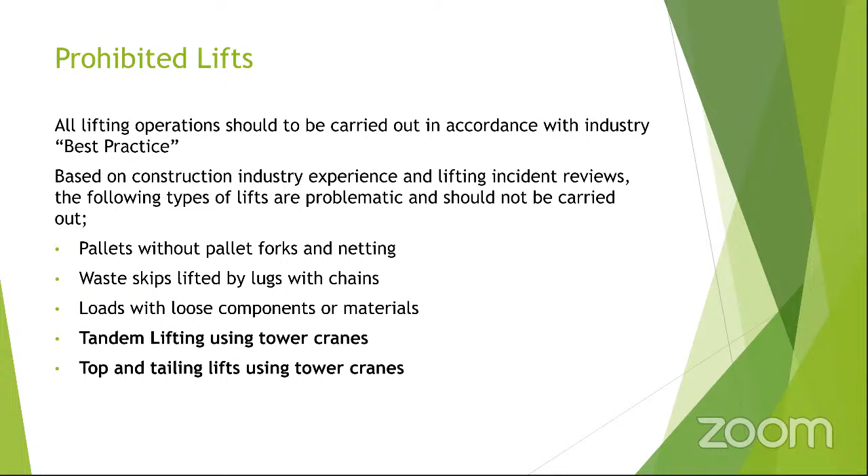Agreed. Anybody else? Okay. Now we're gonna touch on these topics.

The first one's gonna be what you're all interested in, probably: multiple crane and tandem lifting. Now, these should only be carried out when it's not possible for the load to be lifted by a single crane. If you can't, the best thing to do in any case is just to keep going up on the capacity and try using it with a single crane.

But if the load weight's above the chart capacity, physical dimensions are too large, or the characteristics of the load, maybe it's got lifting points at either end and it's a bit fragile in the middle or not very flexible, needs a lifting beam, and the lifting beam might actually take you over capacity for rigidity, and the center of gravity might be at one end or eccentric.

For mobile crane tandem lift, sometimes you may have difficult movements. You may have to move the load a fair distance, or you've got access restrictions. So all these are probably setting you up to do a multiple crane or a tandem lift. But if you can at any point, always look at using a single crane. It's far safer.

Okay, now there's a lot here on the planning, but the main thing to take away from here is you need to do a site visit. You need to go out and establish where the services are, ground conditions, access and site restrictions. Can anybody tell me why you would carry out underground conditions?

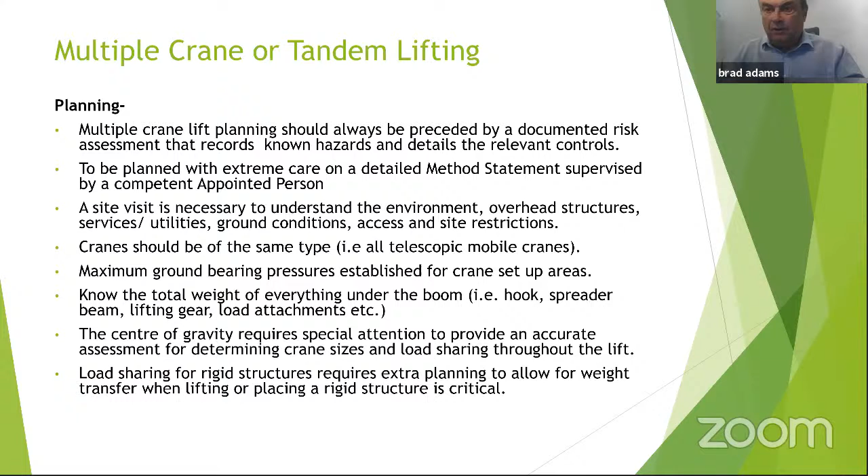When I worked at the airport, I was doing gantries, tandem lifting every day for like 10 months. And I could phone up the people in France and they would tell me exactly how much this 30-ton gantry weighed within a couple of 100 kilos and exactly what the center of gravity was. So it was so easy to work out my load share.

Okay, so where are we now?

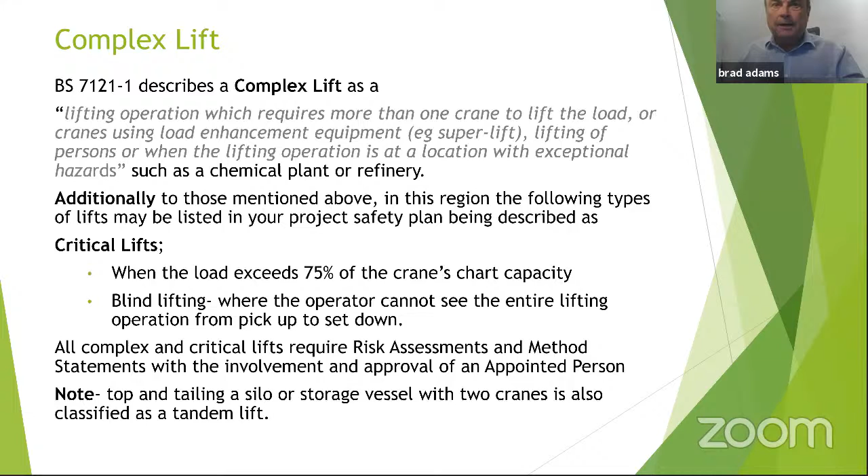Next one. Now, when you've worked out how many cranes you may need, 2, 3, or 4, and you've worked out the load share, it's best to add on. Here's an industry practice: 2 cranes, add 20% on from your load share. 3 cranes, 33%. 4 cranes or more, add 50%. You have a bigger degree of things going wrong with 4 cranes, so you need to be able to take almost half the load again.

Now you've also got to make sure the cranes are positioned to ensure that the hoist ropes remain vertical at all times. Can anybody tell me why you need to make sure the hoist ropes stay vertical on mobile cranes?

Brad, I think we have some appointed persons with us. Let's put the question to the audience. Guys, feel free to unmute your mic. It doesn't matter whether you're right or wrong. Let us share the thoughts so Brad can help you. Thank you. Hi, Brad. Good evening.

So we have to ensure the load lines or hoist lines are plumbed, mainly to ensure that side loading is not happening on the superstructure of the crane and the boom, which is only designed to take the vertical loads. Correct. Now, this is a big problem. If your hoist ropes are out and you're putting side loading on a crane, you can fold up a boom quite easily.

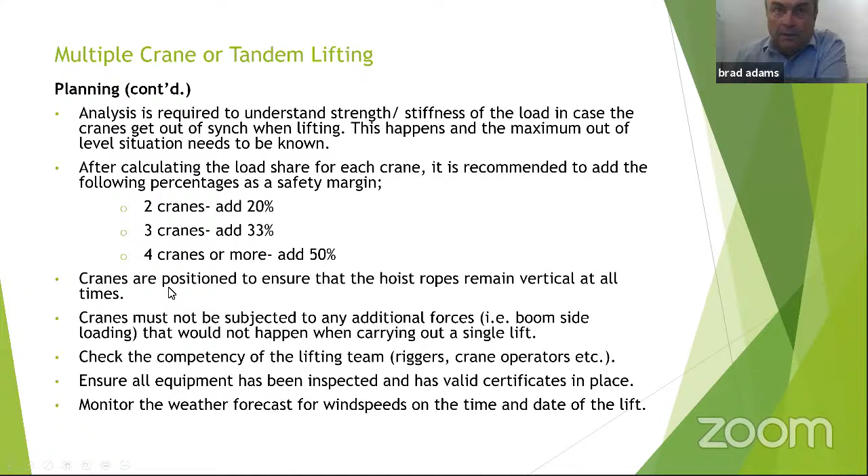During operation, you need to specify one competent person in charge. There's a tendency when everybody has big cranes and everything's going on, lots of people come out and confuse the operators, and somebody thinks they know better. You just got to stop it. You've got to put a total exclusion zone around. You'll have the client down there, all the engineering supervisors, probably the project manager, an audience, and everybody wants to jump in when something goes wrong. You've got to appoint one guy to monitor that exclusion zone, one guy, normally an experienced crane supervisor. If no one else, the appointed person takes over because it's his responsibility.

This is the only person to direct the crane operators with instructions. The communication method between the crane supervisor and each of the crane operators is critical, to enable unison in movement and ensure safe lifting. If it's possible, and you can see the operator, the load, and all the operators, hand signals may be used. But whatever you decide on, stay committed to the communication plan. Don't start changing it halfway through. Whatever you've written down in the communication plan, follow it through.

Now, the cranes are big, they move slow. The bigger the crane, the slower it moves. So ensure there's only one motion at a time, in the same direction, at low speeds. If you pick the load up, pick the load up. If you want to then slew right, do that. Don't try and go diagonally up and over at the same time—it'll just cause you problems and put side loading on the crane. Just break it down into steps: I want to take it up, okay I want to move it right, okay and I want to boom out. That's very simple.

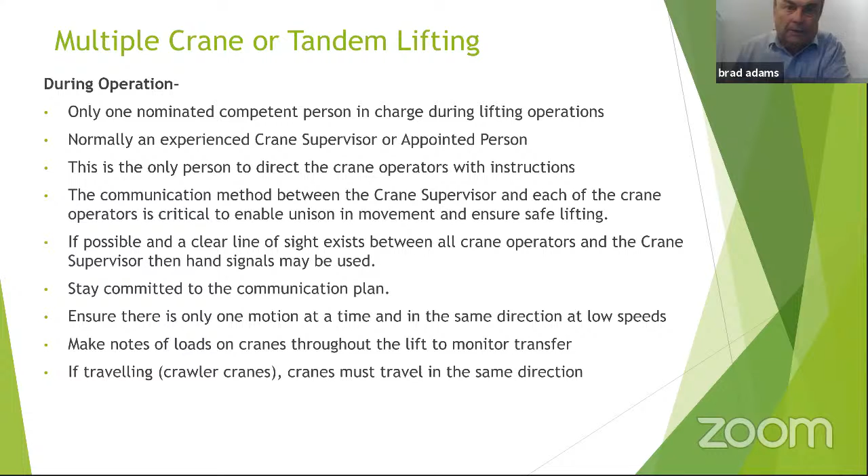And if you're traveling crawler cranes, make sure they travel in the same direction. They're both going forward, not opposing each other and twisting. Any questions on that? We're going to go to the next operation.

Tips. Some of you might have heard about shock loading. It used to be very common years ago, before they had really accurate RCIs. You use the RCI almost like bathroom scales. Say you've got 15 ton on either crane, and that's your load share, worked out with a hook block and everything—just for sake, it's 15 ton. So you would take your crane up in equal increments: go to 5 ton, 10 ton, 11, 12, 13. Then when you get about a ton below your calculated load, start going up in 0.1 of a ton increments: 14.1, 14.1, 14.2, 14.3. When you get to the calculated load, hold and check.

Very rarely will you get it exactly right. One crane might be off the ground by an inch, the other crane might still be sitting on the ground, but the loads are close. So if the crane's off the ground at 15.1, you hold him there because he's off the ground. You take the other crane out—15.1, 15.2, you may find you have to go to 15.3. Then the crane will equalize out at 15.1, 15.3, and that's your new load, okay? And then up you go.

Once the load's on, unless you start moving it around the center of gravity, the load should stay fairly constant, unless it's a top and tail. Now check these load values against the calculated figures on the plan. Once it's off the ground, check, because you may find somebody's added some stuff on there, putting you 2 tons over on each crane, and you're now into your safe margins. At this point, if it's over by a big margin and out of your safety margin—only you will know what you're comfortable with, like 5% over, 3% over, within your margin of error.

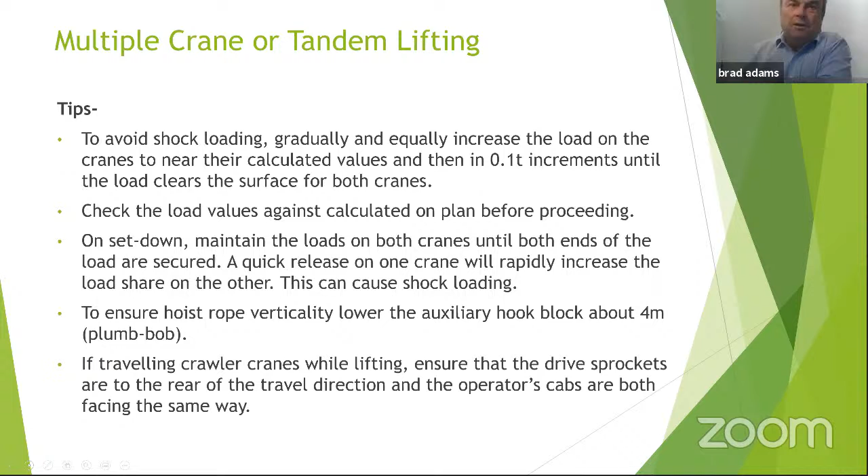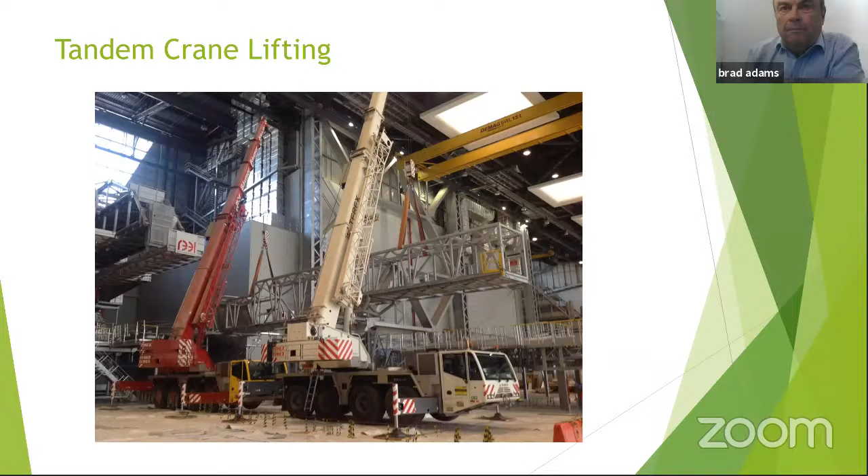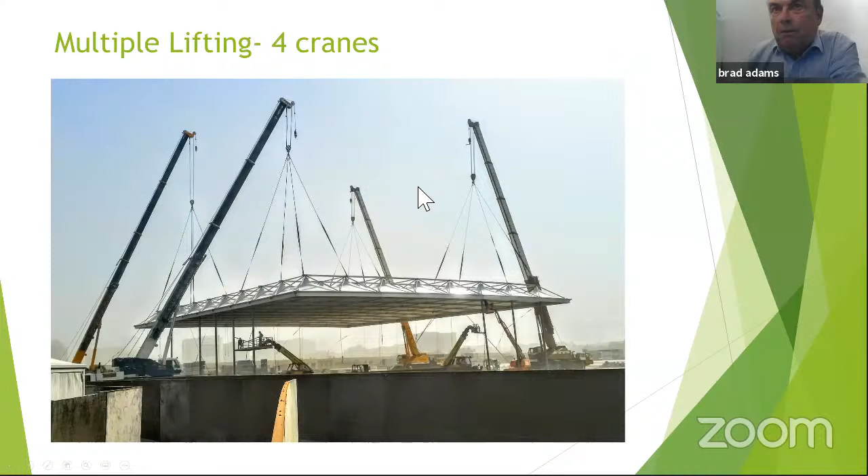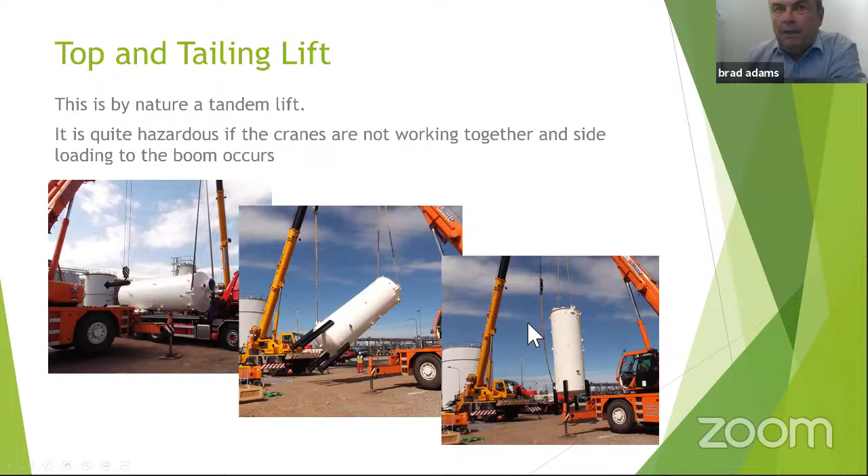Now I'm going to show you a chart which is quite easily available on the internet, but it gives you the total load share. When you're moving the center of gravity and it gets underneath the other crane, it will rapidly go from 50-50 or less to completely on one crane. So the top crane starts at 440,000 pounds at 0 degrees, and finishes at 670. The same on the tailing crane - he's starting at 230,000 and finishing at 0. Notice it's quite gradual, slowly, up to about 65 degrees, and then you start hitting about 75, 80, 85, it just rapidly decreases. So this is where things can go wrong and the pressures can change quite rapidly. It starts at the full weight and the other crane starts at 0, but in between, this is the gray area.

Now, if you're really clever and you do one of these lifts, you can get the operator to magically hold it at 45 degrees and go out and start mapping this out - you'll know for yourself.

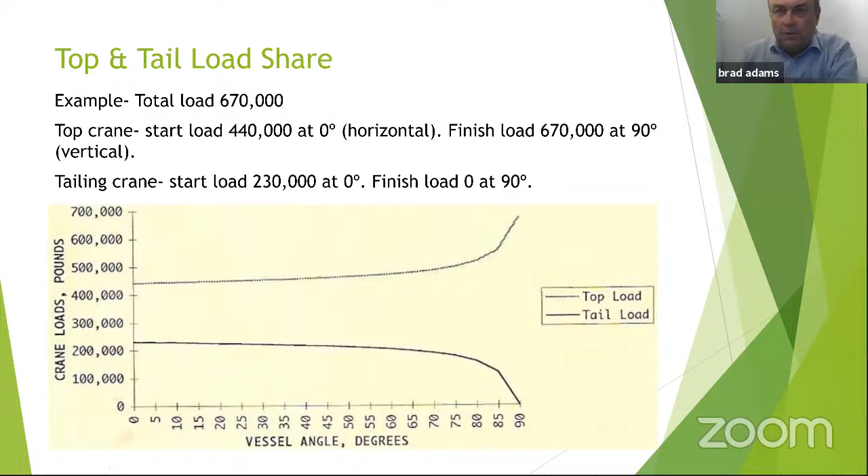It's nice to have this for future reference, because you'll see the same scenario come up in your career more than once. Now, what I'm going to show you happened 4 days ago.

This is a company that knows what they're doing. They brought 2 cranes in, I think a 55 and a 300, but they only needed a 35 and a 160 to do the job. They were taking out a liquid bulk silo, like a whey tank, for a cheese factory, decommissioning it, and welded on 4 lugs, top and bottom. Now what happened was on the smaller tailing crane, you'll see on the third picture on the right that the lifting points have failed.

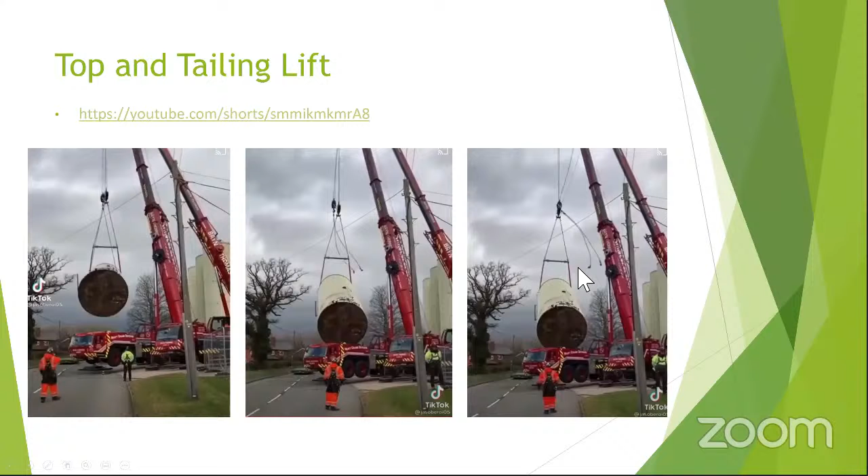Now, this is what happened. It was a 12-ton whey tank, and the only damage, luckily, is this came down and crushed the engine and the engine cowling. So what had happened was, you can see here at the top, the point where it was supposed to be lifted just ripped right off the side. Now, there's no injuries in this one.

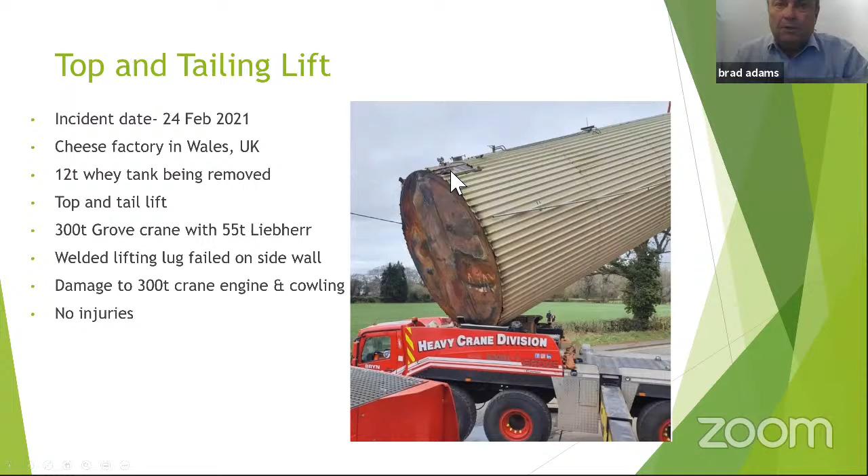Okay, we're going to go on to load enhancement equipment very quickly. Load enhancement equipment, the most common type, is known as superlift. You get a crawler crane in, and they all come with these attachments nowadays to improve them. You'll see it denoted on the load chart as SL or something like SB, suspended ballast. There's like 4 letters and a whole bunch of loads of stuff - a 76-page document with the crane, a load chart for every configuration with fly jib and everything.

Now, the crawler cranes use this attachment to improve their power for heavy lifting and extending the radius. Basically, the crane is carrying out a fine balancing act. On some of these, the counterweight actually gets picked off the ground as they lift, and it's basically balancing over the length of the tracks. It's very, very fine-tuned.

Now, when you bring a crawler crane on site, you normally have to have it third-party tested because it's being built. If you set it up for superlift with the load, then you don't have to have an additional third party. But if you set it up for normal lifting and then add on superlift, you're putting more stresses and strains on it. Technically in the British standard, it's called a change of configuration and a structural change, so you do need a third-party test. You will have arguments with the plant people all day long because they don't want to pay the 1,500 riyals to have it certified. But you can imagine some of these cranes are carrying up to 200-300 tons of ballast hanging off the back, and all that stress goes through those arms at the top of the crane.

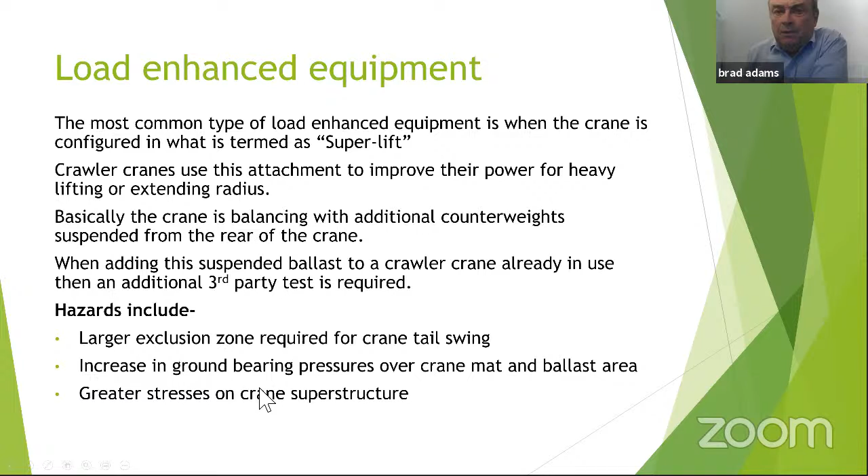Brad, I have a question. Questions on superlift? No, it's not about superlift. When you mentioned the movement, can you put some highlights on the pendulum effects on such cranes when we shift with the cranes?

I'm not - I never get involved with the pendulum effect on that. I don't think they're swinging around that fast. These cranes rotate so slow that the momentum and inertia that is there isn't enough to swing out violently. It's not like you're flinging a cat around by the tail. Okay.

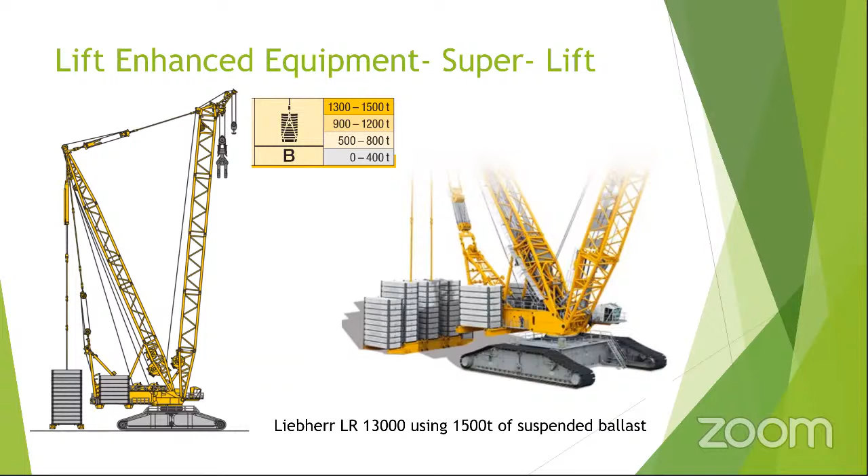Yeah. So is there any calculation for that? Like, is it a rough guess that we are trying to put, or is there any scientific or mathematical backing for it? You could, but this is for what we do. It's empiric. It's an empiric rule of thumb that everybody in the industry basically adds 20% on for 2 cranes, or they add 33% on for 3 cranes and 50% for 4 cranes or more. It's just an empiric rule of thumb.

You could actually go back and work it out, but you're working out, like, if this crane failed, or say you're lifting onto something, and one end had to be suspended and the other end had to be fixed, and you took the pressure off the fixed end before you'd actually fixed it, and it basically caused the other crane to have an increase of weight, that would be your margin that you'd be working in. It would probably be in the region of 10 to 15% if you did the calculations. So these are pretty robust numbers that have been time tested.

It's like when you're doing the ground bearing pressure, working it out for the crane and outrigger sizes, they've always told you to take 75% of the rigged weight. If you use the Liebherr software, it's down to about 40%, because it's more exact and it has all the details of the crane factored in. So 20% is probably way over what you need, but it's a safe, comfortable figure to add on. I appreciate it. Thank you.

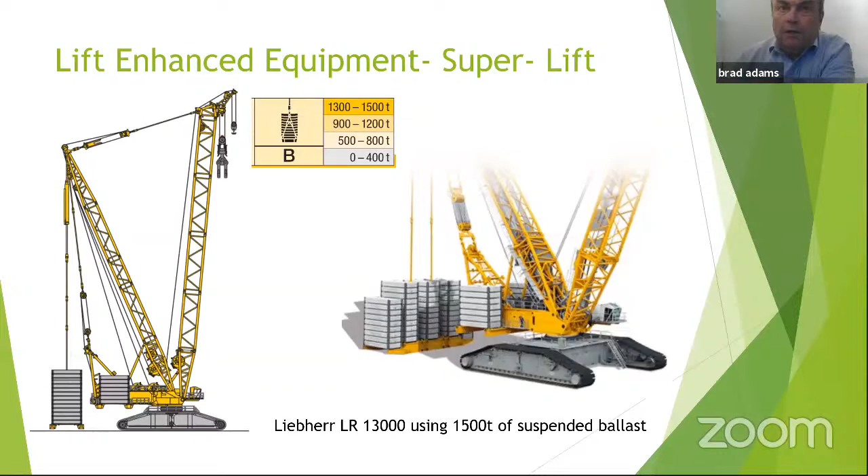Okay. So moving on, we're going to go to lifting of personnel, man baskets. Now, this is one of the most simple things, but I reckon if I drove around Qatar and looked at the various combinations and permutations of man baskets, I've even seen people take the plastic thing out of an internal bunded container, one of those that looks like a pallet with a frame around it and a plastic square for liquids in it, take that out, hook it up with 4 slings and use that as a man basket.

So cranes are not designed for lifting people. That's why you see all these people doing bungee jumping and dining in the sky off them, and people throwing their hands up in shock. It's great, but there's no safety systems like you'd have in a MEWP or any other bit of equipment that's designed for people. So you've got to look at, is there another way of doing it? I would always go back to them and push back and say, can you build a scaffold or can you do it with a MEWP?

And then I would ask, is this a one-time thing? Is this an emergency? Or do you want to do this all the time for a long time? Because sometimes you get these construction managers who are just lazy and they think that's the easiest way to do the work for the next 6 months. I'm going to put people in a man basket for 8 to 10 hours every day. Now your risks go from being a frequency of very low to almost a possible likelihood.

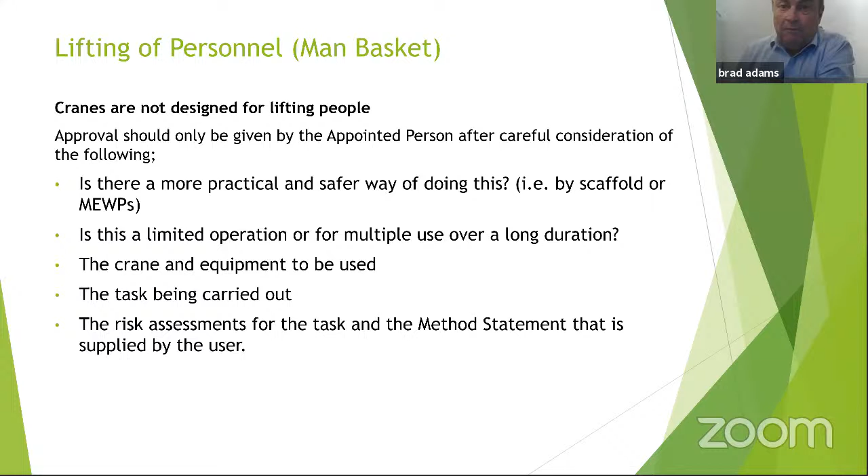Sometimes the crane breaks down and you're 40 floors up and you have to break a window to get out of the crane, out of the man basket. Or the operator just forgets and goes for his lunch for an hour. These are the things that add in.

So man baskets can be used with cranes, providing the following is in place. You've got to have dead man control, so if the operator has a heart attack, everything stops. Power lifting is fitted, power lowering is fitted, and there's no free fall, like we were talking earlier about that free fall in pile driving. If that's present, you need to lock that out, because there's nothing worse than going bungee jumping in a man basket.

Crane's been inspected and tested with a valid certificate within the past 6 months. Now this is where a lot of people forget. They just think the crane's good, so I'm going to throw people on the end of the hook. It's got to be checked within 6 months. That's a very major one, that you're putting people at risk and you're reducing the risk by doing this.

Now, any hydraulic cylinders fitted with devices to prevent movement in the event of a failure. So if your main boom arm hydraulic ram fails and starts leaking and the boom starts coming down, you need to have some sort of device to prevent that. And these things, hydraulic hoses go all the time on cranes in the heat, and they just perish.

And control systems that allow for smooth movement, limiting their speed to 0.5 of a meter per second maximum. So these cranes should be slowly slewing left and right, slowly booming up and out, or jib up, jib down.

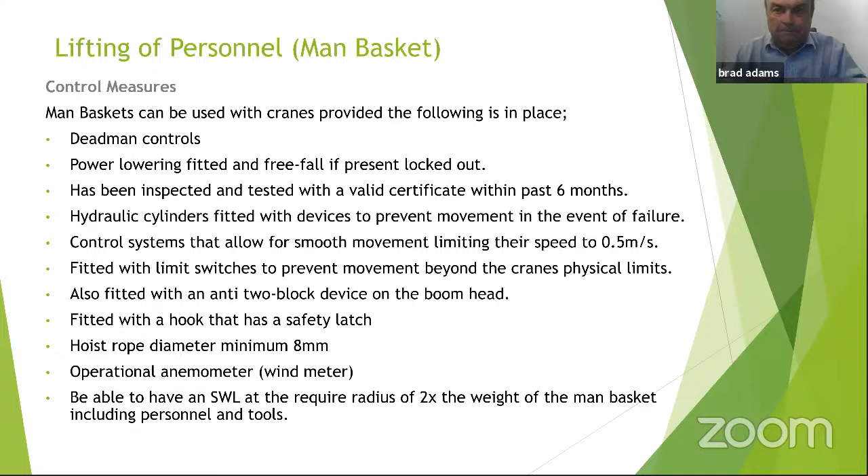Okay. Thank you. But if you can get a cradle, put it in.

Mr. Brad? Yep. Someone is asking for questions so far. I think you are not able to hear his voice. Hi, Brad, Srinath here. Mr. Srinath, I think he's asking 2 questions. I'm sorry, I can't hear you. Can you check your mic volume? Hello, am I loud and clear now? No, I can't hear you. How about now? Can you hear me? No, it's really faint. Alternatively, maybe he can write it.

Sorry, I was driving. My question is that as per BS 7121 Part 3 2017, there is one more additional requirement for man riding on a mobile crane. It says that there shall be means provided with the mobile crane for providing safe access for the occupants of the basket in the event of a control and a power failure. So I have seen only one crane so far with that. Is there anybody with similar experience working on such cranes?

Madhavan, could you relay that to me? I can't even hear it. No, I have the same problem. Srinath, can you type what you said so we can pick it up? Can you WhatsApp you? Yeah, it'll be the same. I don't know what happened. I'm actually driving with my Bluetooth on, I'm not able to text now, but okay. Anyway, I will personally message to Mr. Madhavan later. Yeah, sure, Srinath.

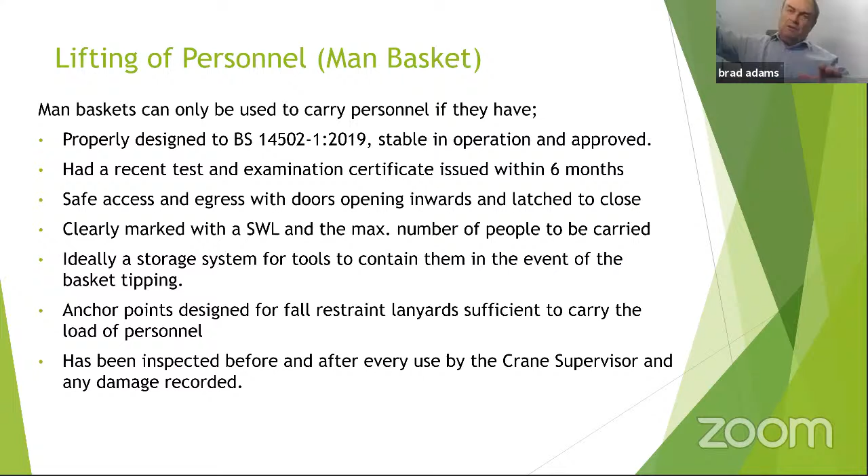Ideally, which is on my Christmas wish list, they have a storage system for tools to contain them in the event of a basket tipping. Sometimes a crane will get wrapped up on something when it's being lowered and it'll tip maybe 10, 15 degrees - that's one of the problems. But I wouldn't expect to see them in Qatar.

Anchor points designed for fall restraint lanyards sufficient to carry the load of the personnel. It's best not to have the anchor point on the handrail, because if you fall out, you're going to fall out on a 2-meter fall restraint lanyard - you're going to be 2 meters out of the man basket. It's best to either have them on the ceiling where you can snap link to them, or on the floor, and there should be one for every person. If you see a central one in the middle, it'll cause people to get wrapped up like a maypole.

They should have been inspected before and after every use by the crane supervisor for any damage. Sometimes these things bash into buildings, they spin round when they get out of control, so it's best to maybe look at that. And I'll show you next.

Basically, every day you get in, you need to inspect it. And before lowering, if you're lowering into an excavation or a hole, do a trial lower first, because you might run out of rope. Some tower cranes are only designed for a set amount of rope, and they might run out, or they might be on the limit. You may be putting a 50-meter deep shaft in with a man basket and find out the crane's only been designed to go down 40 meters below ground. It has happened, and then the rope's hanging there off the end of the drum.

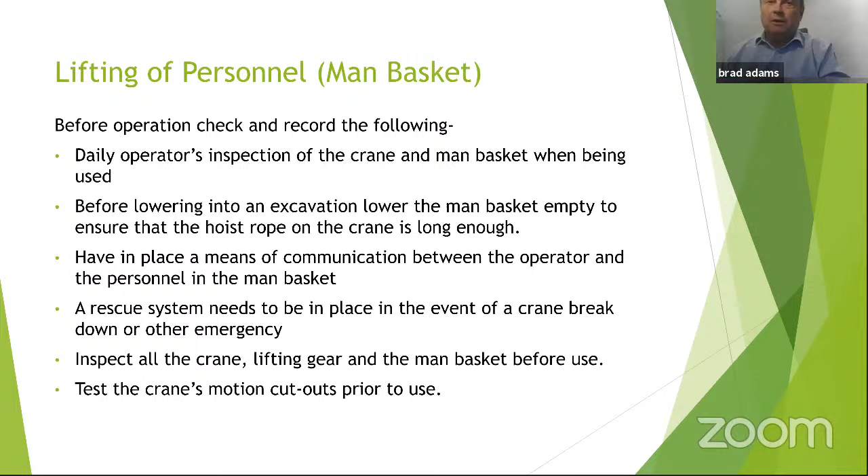Next, measures to prevent the man basket from spinning. If you're just off the ground, 10 meters, use tag lines. If you're going up quite high up the building, get it close to the building so that it actually... a tag line 10 meters from the base is like a child with a balloon - there's nothing controlling it from spinning at that distance.

What happened there? I just got a scrolly line go across my thing.

The wind speed should not exceed 7 meters a second or 25 kilometers an hour. This is in the British standards, for safety reasons - don't exceed that. If the wind forecast says it's coming up, you may get 7 meters a second on the head of the crane, but at the work face, if your crane's windy above and you're sheltered and you're lifting, you've got an anemometer in the man basket, and you're getting 5 meters a second, carry on.

If you're working next to a building, you may have what's called the windward face and the leeward face. You'll be in shelter as the wind goes around the building, but on the sides it will be faster. So it all depends on where you are with the wind.

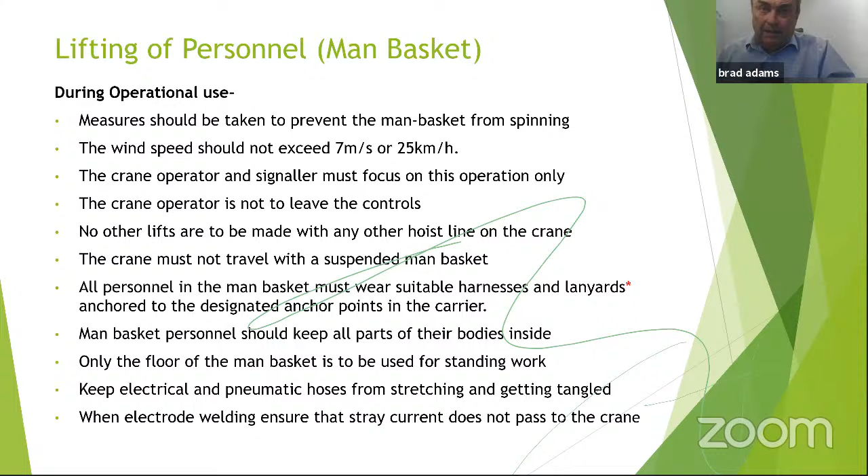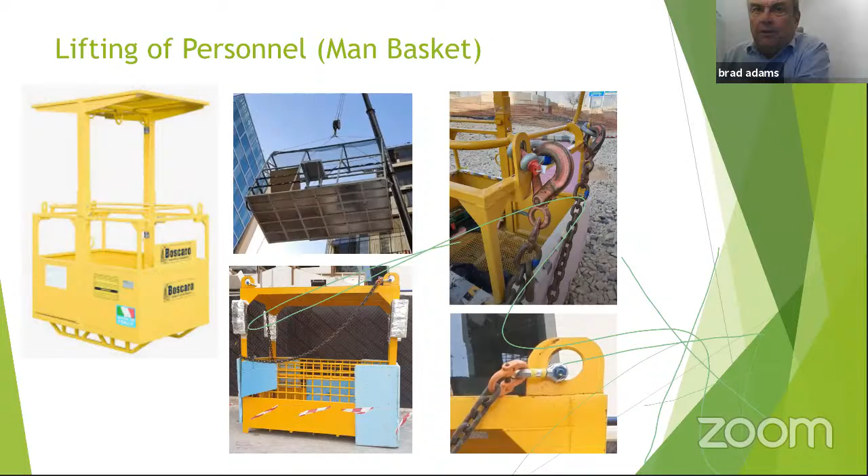The chain has to be able to take certain factors - 8 times safe working load for chain and 10 times for steel wire rope. So there's even a set size for the chain and steel wire rope. You'll find that in the British Standard 14502. It walks you through everything needed to get a man basket made in Qatar.

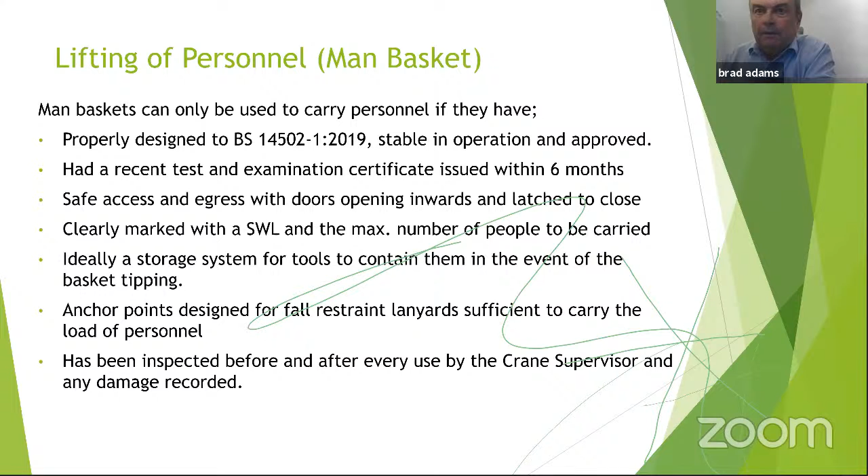Okay, we're getting up to locations with exceptional hazards. This is a very quick one - this is when you're working near a chemical or an oil and gas plant. Has anybody worked at Qatar Petroleum? Done a shutdown?

Basically, there's a lot of risks working over live plant, live factory systems. So what they generally do is do a shutdown, and then they take major components out. Or if it's a power plant, they'll de-energize some electrical part of it, or pressurized systems, they'll just depressurize them. Each client has their own specific requirements, procedures, and processes.

You may even find Qatar Petroleum has their own lifting procedures. They have permits to work, permits to lift, and they even have their own specialized and approved lifting training qualifications. Now, if you ever find yourself up in Qatar, you'll see on the back of the third-party certificates, there's a thing that says spark arresters. That's a Qatar Petroleum must for not causing explosions.

Also, when cranes are working over certain areas, they have to have slew restrictors and zoning. So sometimes the tower cranes can't lift over an area. They will be physically locked out by the software in the crane. It'll stop them from arcing or slewing over something.

Now, restriction on the use of certain types of lifting gear. Maybe they don't want you to use fabric web slings because the chemicals or the heat is corrosive, and there are endless slings. A lot of this I'm hearing, I've never experienced, but I don't think they like those endless slings. I don't even think I've seen them used too much here in Qatar. People prefer just the fabric web slings or chains. Any questions on that one?

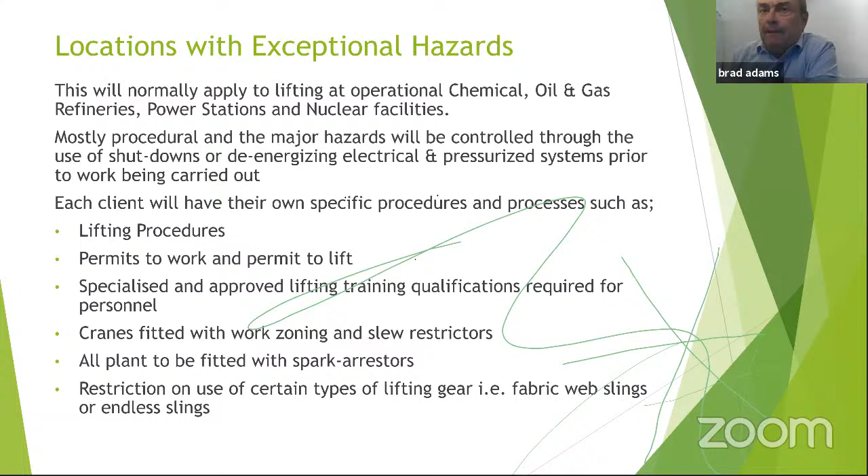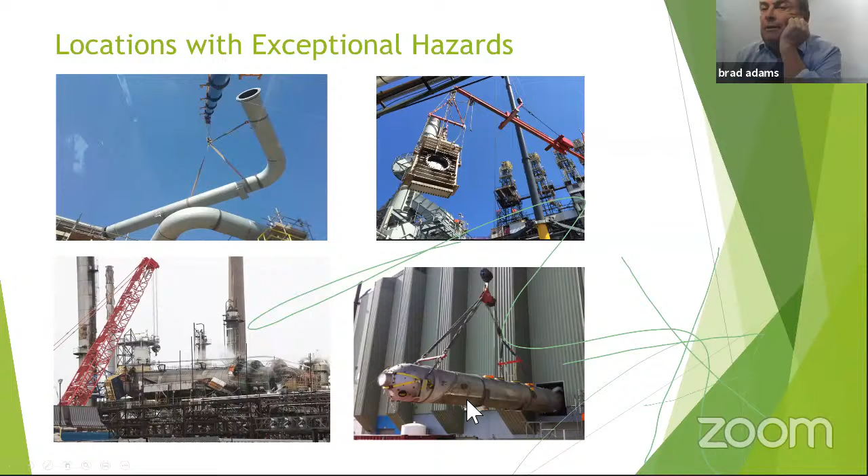This is a very quick one. There's some pipe work going in, components into a live facility. This is a topping and tailing that went wrong and is getting recovered. And this is some sort of pressure vessel going in the side of a nuclear facility. It's getting slid in. They're just examples.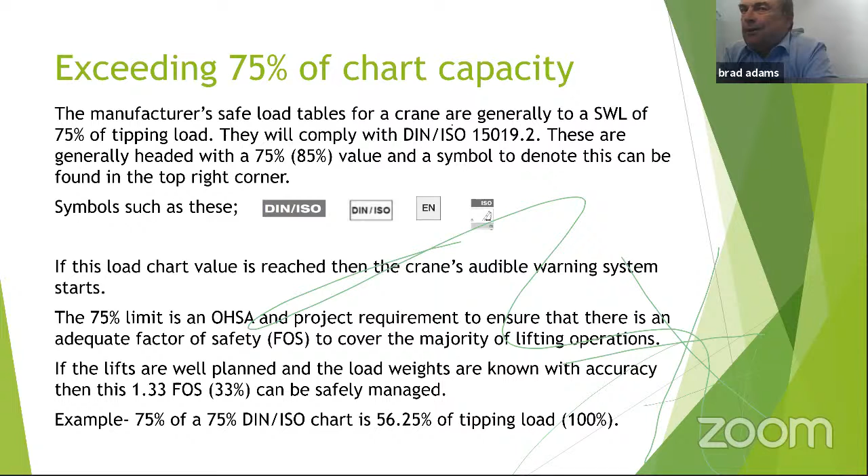Last one, and this is the American OSHA critical lifting, exceeding 75% of the chart capacity. Now, if you've ever had to look at a lift plan, you'll notice that in the top right corner, there's a little sticker just above the load chart. It says ISO, DIN, EN. Now, this means the chart complies with ISO 15019.2, and it's generally headed with a 75% figure. And sometimes you may see the 85. That's in countries like, I believe, the Netherlands, and a few European countries use that. If in any doubt, just make sure you've got the 75% chart.

If this load chart value is reached, then the crane's audible warning system starts. So there's an internal warning at 75, and then it goes a bit higher, and then it becomes external. But you're still at 75% of the crane's tipping load. Now the crane has been tested on that chart load plus another 25%. So the crane has been structurally tested almost up to tipping load, but not quite. So this crane is structurally capable.

Now, the OSHA 75% limit is generally a project requirement. I'm finding it in the project management safety plans. And if you work to that, they've put that as a blanket statement to cover all lifts so that you don't have to think about it. You don't have to say, oh, it's 2 ton, it turned out to be 3 ton. It basically accepts that people don't do very good lift planning.

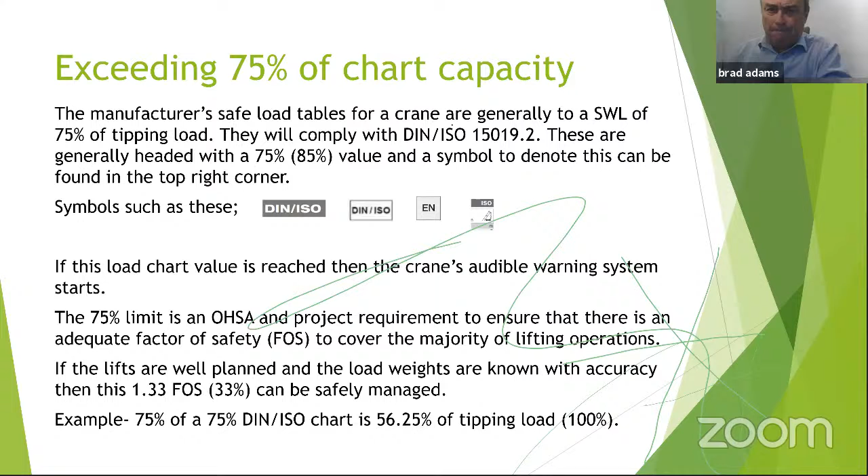Okay, the crane capacities could be 75-ton cranes, and you could use a 50-ton crane. But you need to know that if you're going into that last 25% on the chart capacity, you need to know accurate weights and loads of your rigging.

You can either do this by calculation, or every time you pick something up, write it down, and you'll eventually get a schedule of lifts, and you'll be able to say that generator weighs 4 tons. Write it on the side of it. That's what I do - take a big marker pen, and every time I lift it, I take the hook block off and say that generator weighs 4.3 tons, done. I put it in my schedule of lifts, and next time I go to lift it, I know exactly where I can put it.

If you're going into that zone, do a reevaluation of the ground bearing pressure and outrigger pad sizes, because maybe you're putting more pressure on the ground than it was tested for.

Know the maximum operating wind speed of the crane. Mobiles, generally around 9; tower cranes, a bit more, maybe 13, depending on the make, and tower cranes can go up to 20 meters per second. I know your PMCMs will write in your project requirements that the crane cannot work past a certain figure, but it's based on the individual, and it also says based on the manufacturer's requirements. It's very hard to control a crane above 15 meters a second, believe me, and that's just lifting rebar - there's too much shake on the crane to control the load.

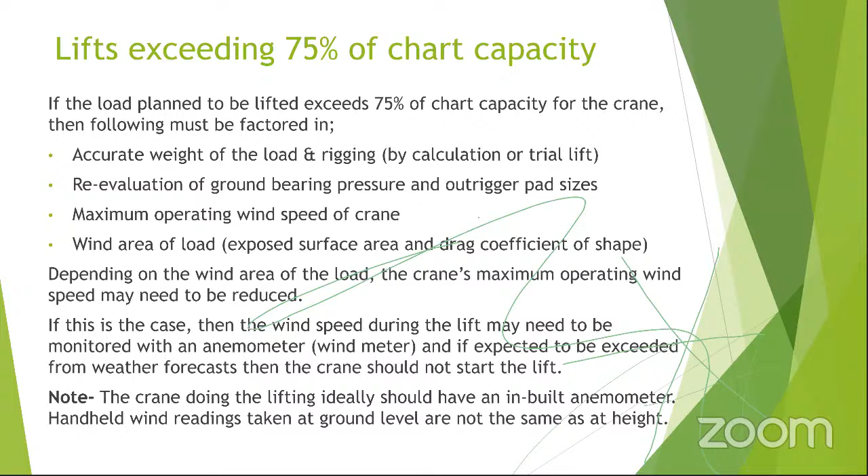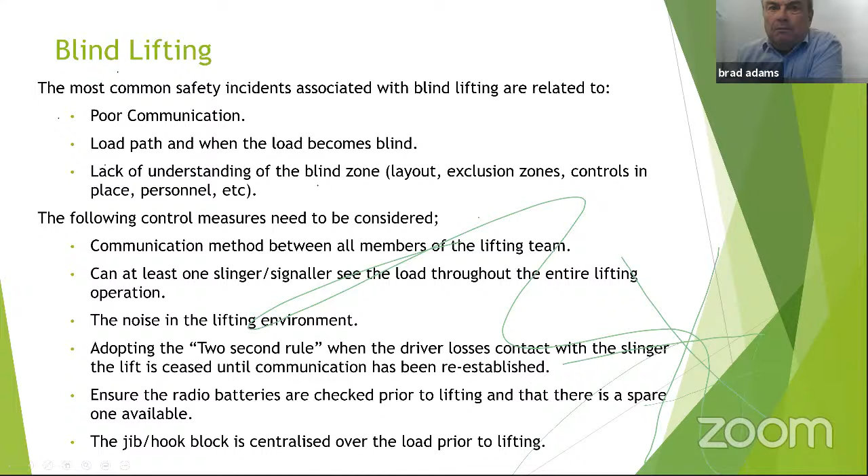Okay, so there we are, we're finished.

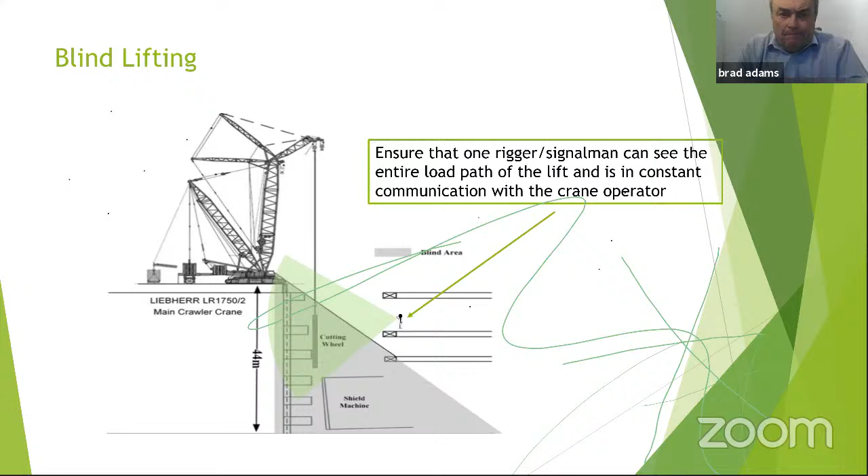Let me turn this off. Stop share. There. Yeah. Okay. Anybody else got anything? I don't mind. Last question. Hello, sir. Zana Xavier. Hello, sir.

Hi, sir. I just want to use this opportunity to understand this question. I went somewhere and I was actually embarrassed. The interviewer asked me, as an appointed person, what do we have to do in case of high wind using a tower crane? And he went further, saying that you can find it anywhere, those are the basics you should even know. I was embarrassed because to me it was very strange, and I did not have the courage to ask him, sorry, I don't know, could you tell me? So I just want to know from you, what are the things an appointed person has to do, maybe an instruction he has to give to the tower crane operator, when it comes to high wind speed?

Well, I know for a fact in Qatar, they used to limit my cranes at a blanket speed. I can't remember what it was, but it wasn't up to the manufacturer's speed. Now the crane technically can work up to 20 meters per second. That's very fast. But imagine trying to control the load with the crane bobbing around and the load going into a pendulum effect. So I think I limited it at 12 meters per second, and that was for lifting rebar. The project was delayed, and I said to them, well, you can go up to 15, but you will slow yourself down because of the difficulty in controlling the load.